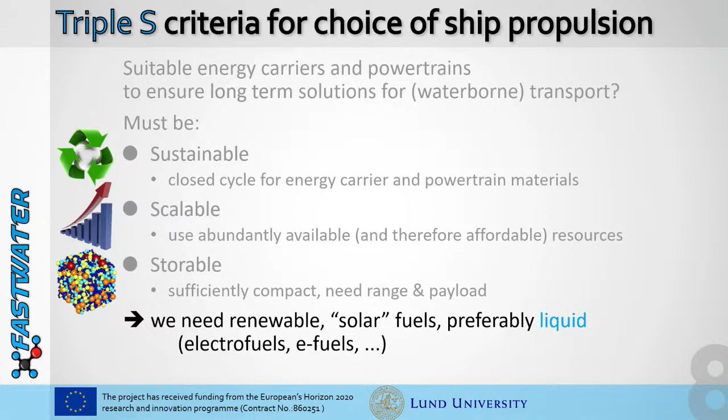First of all, there will always be a need for fuels. There's many things we can and should do electrically, but there are also limitations to that technology. For quite a number of applications, we need the energy density of a fuel. But obviously those fuels need to become renewable; we need to move away from fossil fuels. For applications where you really need storage density, there will always be a need for liquid fuels. So liquid e-fuels are definitely going to be needed for a number of applications.

If you combine these things and look at what we set out to do within the FASTWATER project, basically we see we have to go for renewable energy in the long run. So green electricity is what we will power a lot of things with. This is sustainable, this is scalable. It's a huge challenge to scale up renewable energy, but we know we have enough of it, so that's a comfort. Then we look at how we can actually make that green electricity manageable.

How can we power heavy transportation with this? We need to look for things with which we can store that power. So we're looking at producing green hydrogen, and capturing CO2, carbon dioxide. These are things that are abundantly available, so that answers the scalability issue.

Once we start building things from these scalable resources, we need to build smart things, and we think that methanol is a very smart choice. It's the simplest hydrogen carrier that is liquid at atmospheric conditions, which makes it storable. Having a liquid means the number of applications you can tackle with this is much wider.

On the use of methanol, obviously CO2 will be liberated again, but if you start from captured CO2, you set this up in a closed cycle, so you don't emit any net CO2. You don't contribute to any CO2 rise in the atmosphere.

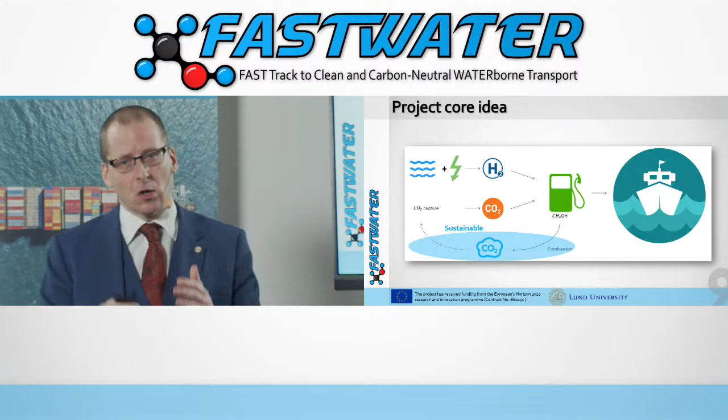So over 3 years ago, we started thinking: okay, there's a clear need for an alternative in maritime. We think this is a really strong candidate. We weren't the only ones thinking that—we saw a lot of interest growing around us. But we also saw that there were a number of challenges that still needed to be tackled.

What we identified 3 years ago is that, first of all, a number of people really wanted to start moving into this, but were hindered by the fact that there were no methanol engines commercially available in the power range, let's say 100 kilowatt to about 10 megawatt.

I'm happy to say that the first engine has now been launched commercially within our project. More of that you will hear a bit later this morning.

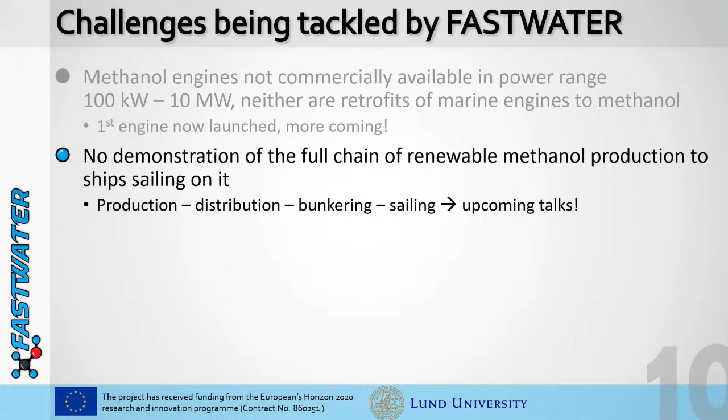A second big challenge was, okay, we need to move away from fossil fuels. Once you start looking into different fuels, it's a whole value chain that you have to start changing, from producing renewable fuel up to actually sailing on this renewable fuel. That's a daunting prospect. We needed to have demonstrators out there, and we have managed to do that.

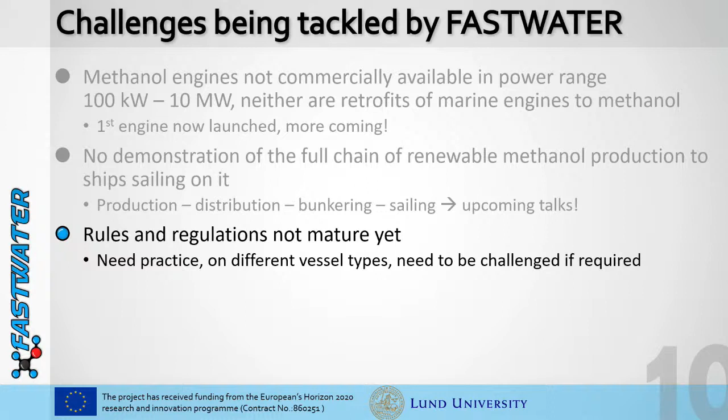Stay tuned for the following talks going into each part of this value chain. Also important, very frequently a hindrance to introducing new things is rules and regulations. There were embryonic rules and regulations a couple of years ago. It was possible to do this, but again, we lacked experience with them. We lacked demonstration on different vessel types to really get this into our fingers - what works, what doesn't work, how should we tackle this. So recognizing these challenges led us to submitting this project proposal to the European Commission and then getting it funded.

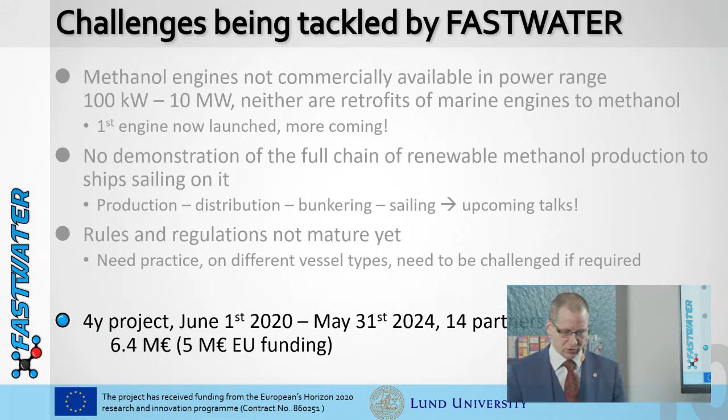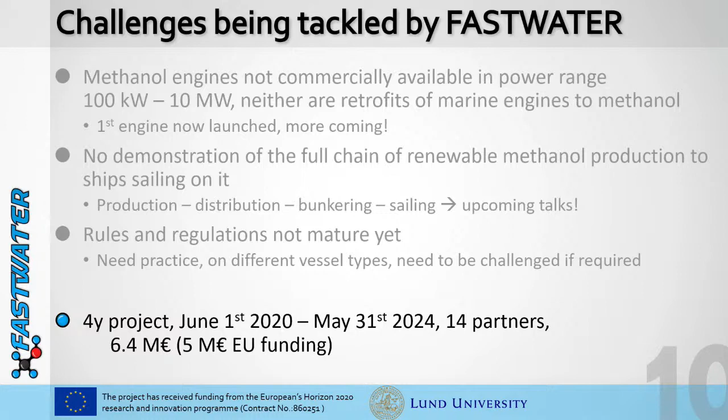We started about 18 months ago, June 1st, 2020, with a 4-year project with 14 partners that I'll show in a minute. What we are doing on a daily basis now is working on engines, working on different methanol engine technologies, working on different power ranges to really make these commercially available. We have the first products out there already, and more coming soon.

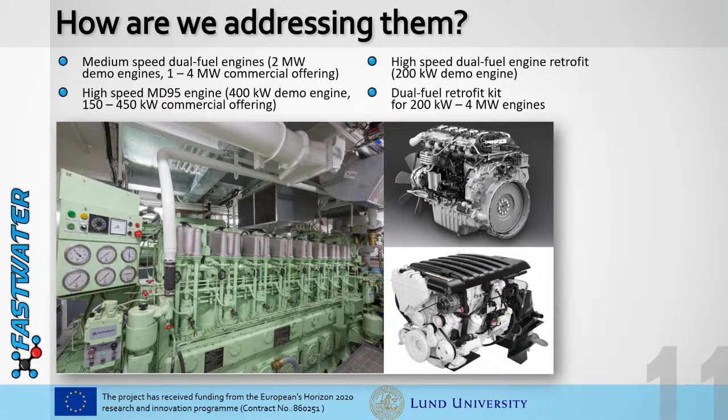But ultimately, these engines need to end up in vessels. So within this project, the one you are going to hear about today is the launch of the pilot boat. You're going to look under the hood in a couple of minutes. That's our first demonstrator, ahead of schedule, I'm very happy to report.

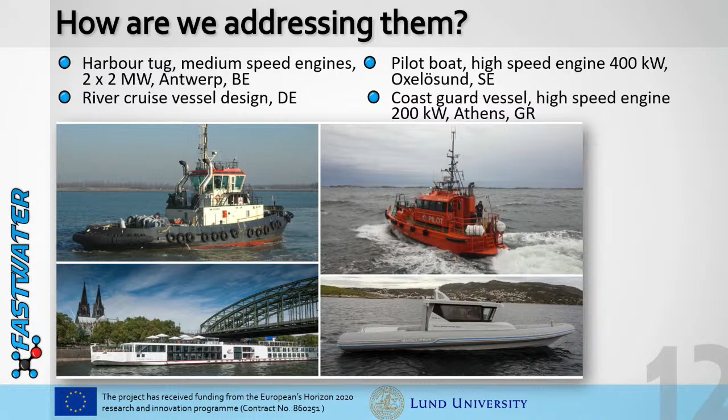And then simultaneously, we're also working out the design of a river cruise vessel - what it would mean to convert such a river cruise vessel, which you see on the bottom left, to the use of methanol.

So that's a number of partners, of course. Quite a number of pieces of the puzzle have to start lining up to make this happen. We're spanning quite a number of different partners, from fuel suppliers ultimately to vessel owners, such as the Swedish Maritime Administration. Even that is not enough, so we're very happy to have these partners on board, but we're equally happy to also have quite a number of partners in our advisory boards that help us with advice on how to really make this a reality, how to exploit this, where to identify early movers, to help us out with these guidelines, to tweak them so that this all becomes feasible.

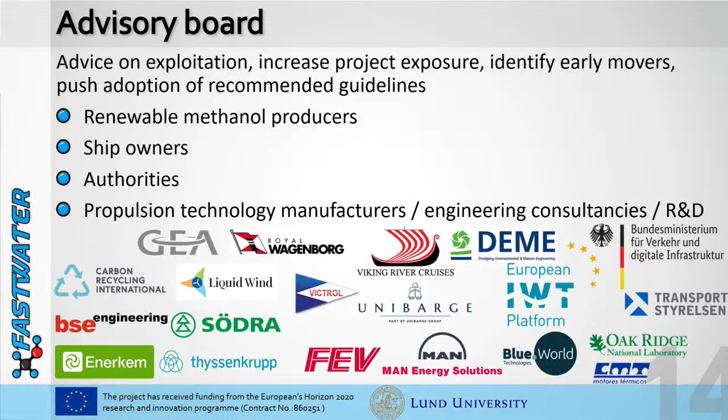So with that, thank you very much for your attention, and I'll happily pass it over to Mr. Eelco Dijkstra from the Methanol Institute.

Thank you very much, Sebastian. Good morning, all. First of all, a great thanks to the Swedish Maritime Administration for hosting today's launch event and for giving us the opportunity to present briefly to you. On the off chance that you may not have heard of the Methanol Institute, it is a global industry association. We represent the world's largest methanol producers, methanol distributors, technology providers, and increasingly also methanol consumers, especially on the shipping side. Companies like MSC, Oldendorff and Maersk are all members that have joined the Methanol Institute over the last year.

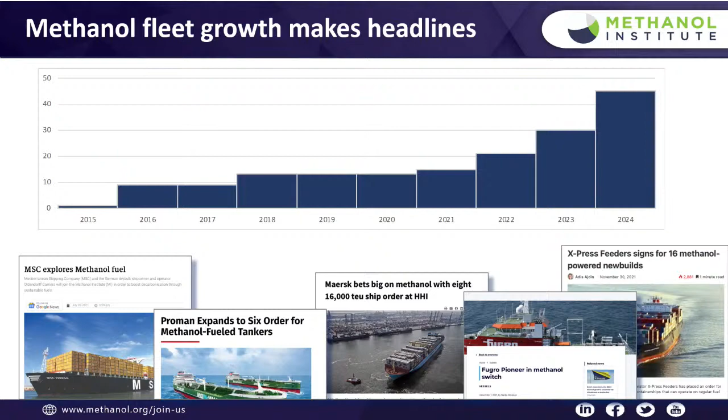Speaking of use of methanol as a shipping fuel, you only have to open up a shipping magazine or read a maritime website and you see all sorts of articles and headlines about promises of climate neutral, sustainable alternative fuels. What sets apart the different headlines, whether it's the announcement from Maersk of the 8 container vessels, or X-Press with their 16 feeders, or the 24 million euro subsidy that the Dutch government has provided for a methanol project with companies like Fugro, Van Oord, Boskalis and many others, is that methanol is not 5 years out. Methanol is happening today. We have approximately 45 methanol-powered vessels on the water today or on order.

There are more vessels on order as we speak, and it's only a limited amount of time before we will see the first 4-stroke engine, and really almost all major engine manufacturers are working on their methanol solutions. But the question is why? Why are people looking at methanol as an alternative fuel?

We had two speakers from the Swedish Parliament here today. Policy is an important driver behind what's happening in the shipping industry. We tend to forget that actually the first driver for the shift to methanol as an alternative fuel was not CO2, it was the introduction of the sulfur emission control areas by IMO. So in 2015, Stena Line introduced the Stena Germanica, which operates on methanol in the form of a retrofit. Since then, CO2 has become much more of a topic in shipping.

On the international stage, we have the IMO that is trying to drive the international shipping industry to lower carbon emissions, starting with 40% by 2030 to 50% reduction by 2050. But you can imagine that if you try and do this on the global stage, it's quite challenging, because where Western member states, Western countries and Western stakeholders feel that IMO is not moving fast enough, we have other parts of the world that are saying, well, hang on, we're going too fast.

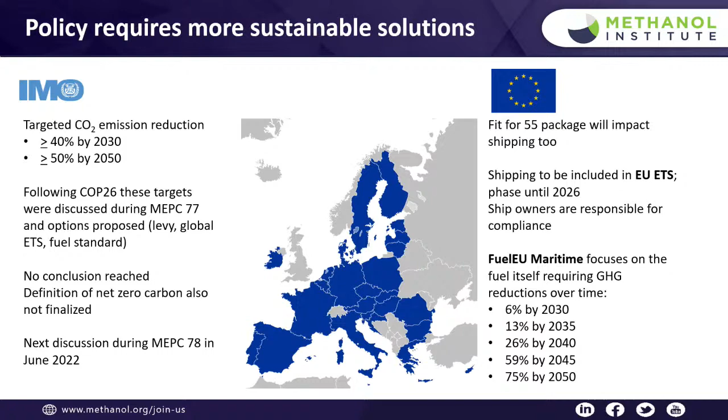And at the same time, Europe also has introduced the FuelEU Maritime regulation, which is looking at the fuel standard. Similar to what the Fuel Quality Directive did for road fuels, the FuelEU Maritime regulation is looking to reduce the actual carbon footprint of marine fuels.

So where does methanol come into that picture? Now, as I briefly touched upon, methanol, whether it's fossil methanol or renewable methanol, has an immediate benefit when it comes to reducing local air emissions. It can also drive CO2 emissions down, especially when you start producing renewable methanol.

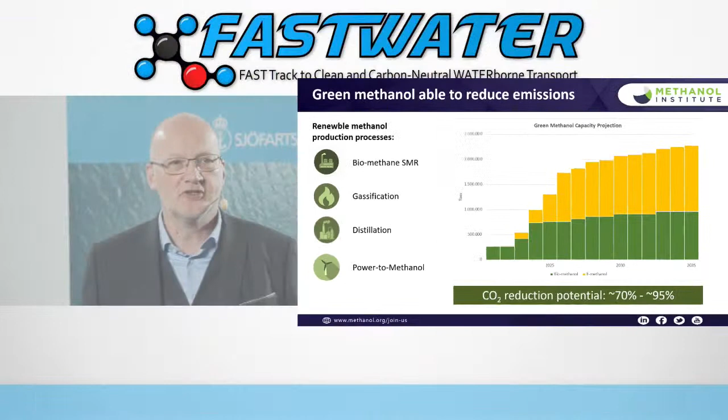The question we get asked often is, how much renewable methanol is available? When will it be available? In order to answer that question, we first need to look at how we actually produce renewable methanol. I'm not an engineer, I'm not a chemist, so I've definitely oversimplified things here, but really you can bracket, or put the production of renewable methanol into four different buckets.

Today, most of the methanol produced worldwide is made from natural gas. If I switch over from natural gas to biogas, I don't actually have to change anything to my methanol production process, but I can start producing biomethanol. Another way of producing biomethanol is by gasification of either biomass or municipal solid waste, which gives you a syngas, which is then easily reacted into methanol.

The next speaker after me is from Södra, and he will talk in much more detail about the specific process, which I have simplified by calling it distillation. I know that's not completely doing it justice, but we'll hear more about that. And then the last pathway, also briefly touched upon by Sebastian Verhelst, is the production of so-called e-methanol, or in legislative terms called renewable fuels of non-biological origin, which means as much that we take renewable electricity, convert the electricity into hydrogen, and then react the hydrogen with carbon dioxide to produce methanol.

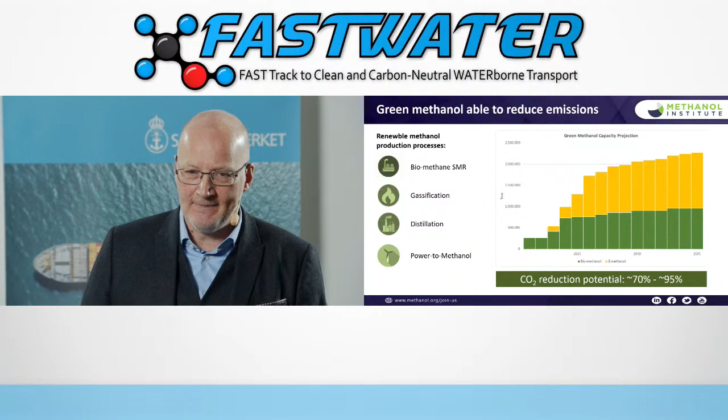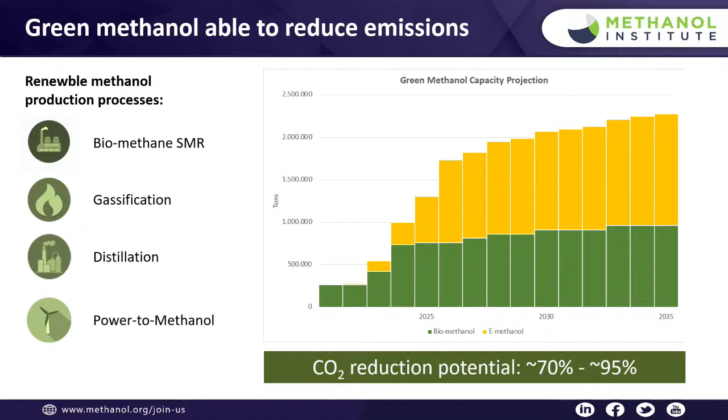In the chart that I'm showing on the slides here, I have tried to summarize what we have seen in terms of various announcements of different projects. Roughly we see projects equating to an order of magnitude of about 2 million metric tons of renewable methanol in the next 10 years or so. Probably some of those projects will not come to fruition, but then again, every other week there's an announcement about a new project, so we're quite optimistic about where this will be headed. But the future will only tell, and it's really a question between supply and demand.

It's a chicken and the egg discussion, as usual.

So to summarize, why methanol? Methanol is liquid at atmospheric pressure and available in all major ports around the world. It results in immediate lower emissions, so better local air quality, but it also has the potential to reduce carbon dioxide. Something often neglected in these discussions is that methanol is biodegradable, so you shouldn't have a spill, but when you do, methanol causes very few problems.

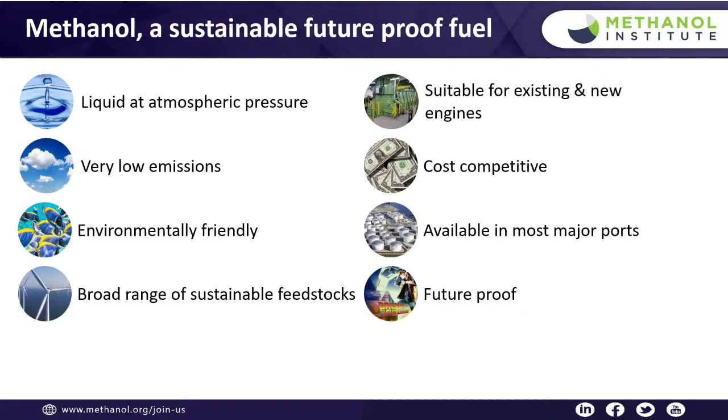Methanol can also be made from a wide range of renewable feedstocks. It can be cost effective, and when you look at various studies on the transition to alternative fuels, methanol is one of the lowest cost solutions in terms of total cost of ownership. So really, methanol is a future-proof fuel, but one that's already available today, and it's here to stay.

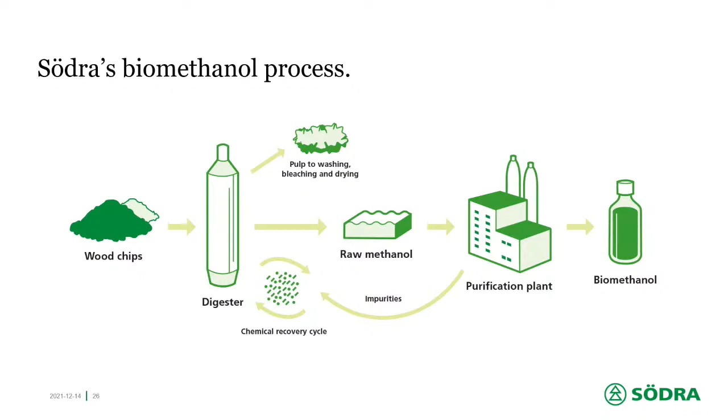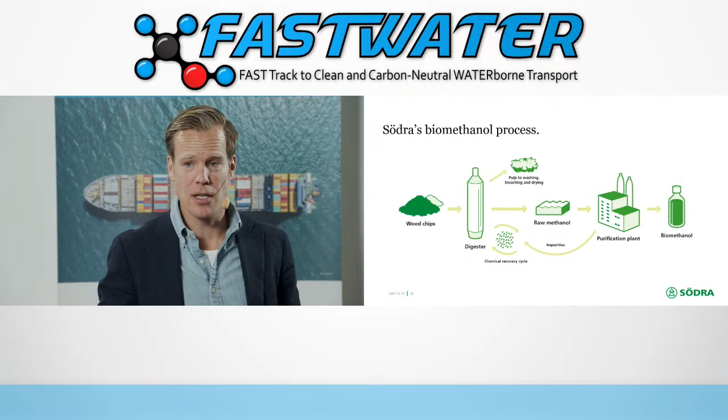During this operation, biomethanol is also formed together with other volatile compounds. This mixture we call raw methanol, because it's composed of different things, and it's really stinky. What we need to do is purify this stream — we remove all the components, and what's left is our methanol that we can then sell into the market. So that's a simple explanation of how this works. Sounds easy, but it's not — it has taken us many, many years to develop this.

Just to give you an idea about the journey that we have been on, we actually started this project roughly 10 years ago, with the first idea of how we could start supplying the next generation of biofuels. A year later, we had to construct a special lab just because the product is so stinky, and we did it in one of our mills in Mörrum, with promising results. So 2 years later, we moved on with a pilot plant. And a couple of years later on, we saw that, yeah, this is commercially viable.

Let's move ahead with a pre-project and see how we could actually construct this. And 2017, our board took a decision to move on with the commercial plant. And just the day after, the procurement phase and construction phase started. And during fall 2019, we fired up the plant. And it was really a bumpy start, I must say that. Sometimes you had 2 steps ahead, 1 back, sometimes 3 back. You know how it is. This is really tricky.

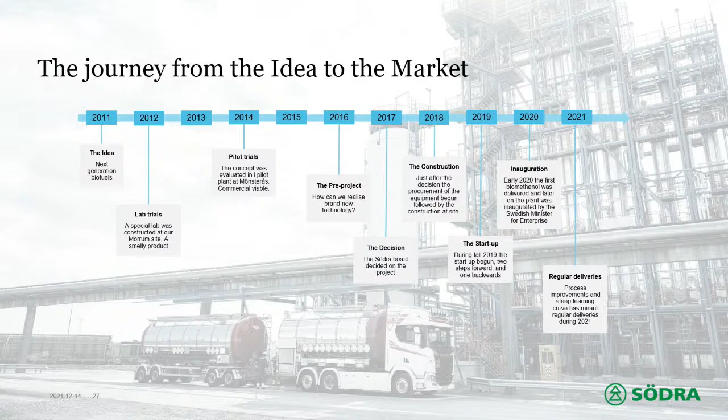But roughly a year ago, during the autumn 2020, we had an inauguration with the Minister of Enterprise, Ibrahim Baylan, who pushed the button. And since then, the mill has been working really, really good. We are now up at the design capacity, and we are selling this product out regularly in the market. I was really pleased now also with the pilot boat here being bunkered with our methanol.

The application, let me put it like this. The methanol market is huge, 100 million tons plus. The biomethanol market is really a niche market. We try to find those that value a product that is based on the forest. And today we sell it into applications like pharma, we sell it into the flavor and fragrance industry, and of course to the biofuel market, which is the big one.

There's a huge difference, of course, compared to our volume and the total market volume for methanol. But this kind of technology is possible for all kinds of pulp mills all over the world. And if we look at that potential, then we're talking about 2 to 3 million tons of biomethanol that might be produced from these pulp mills. A really resource efficient way.

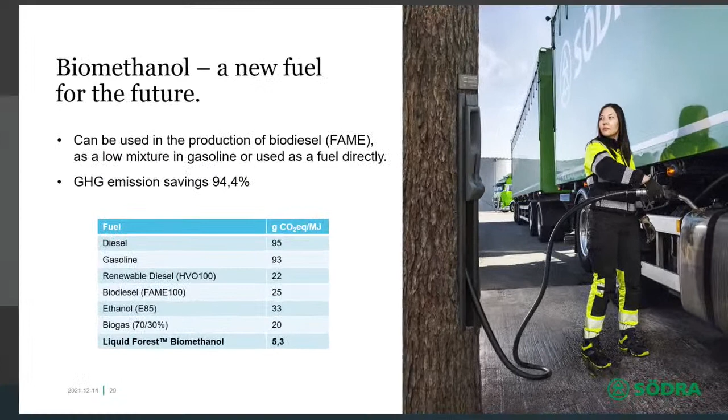Talking about biomethanol as a fuel for the future, well, there are different ways of using biomethanol. Our biggest customer today, they produce biodiesel according to the FAME process. That's one way of using methanol. Another way is to use it as a low mixture into the gasoline pool. Or, as we're learning today, use it as a fuel directly. And if you use it as a fuel directly, you save a lot of greenhouse gas emissions. We are talking about, with our numbers, 94.4% that you save.

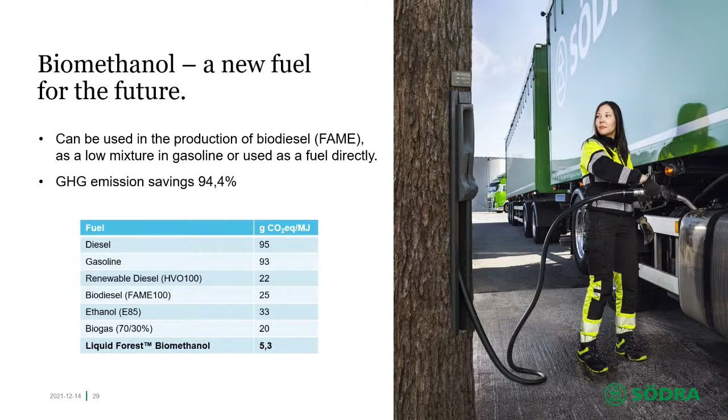And if you compare it to other kinds of fuels that also emit carbon dioxide, also those renewable alternatives, you see that HVO or FAME or ethanol, they emit 5 to 6 times more carbon dioxide than biomethanol. And biomethanol is really a very good example showing how you could work resource efficiently.

So I'm really happy to be here today with this kind of new chapter also for biomethanol being used as a fuel directly. And I'd like to congratulate everyone involved with this pilot boat conversion. I think this is a great way to show how we all can cooperate together and save greenhouse gas emissions. And by that, I would like to end and just remind everyone that the future is made of trees. And now I hand over to Magnus Persson, who will talk from Malte Fuel and Wash.

Thank you. Thank you, everybody, for being here. I will say a special thank you to the Member of Parliament here and also the General Director for Sjöfartsverket, the Swedish Maritime Office, project delegates, and ladies and gentlemen.

Today it's an honor for us, this project here, that we have been chosen to be the supplier handling the fuel. It's 100 years ago since we did the first fuel distribution installation south of Halmstad. And it is great to see that new fuels are coming to the market instead of what we have had before.

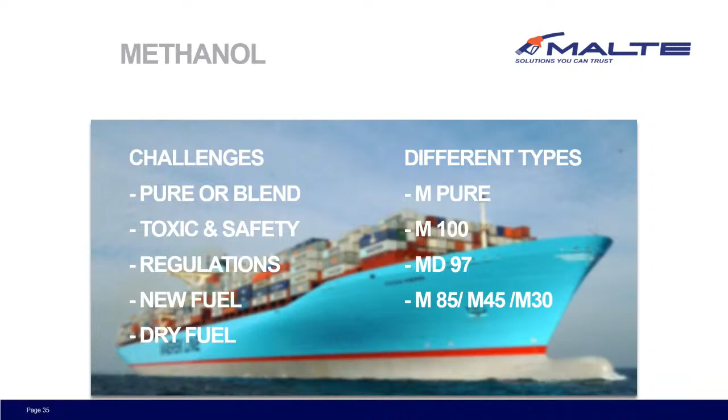Then of course everybody's talking about toxic. What is toxic for what? Is it toxic for human beings, living animals, nature, water? If it's toxic in one situation, it's not in general. So it's also important to understand what is the need and what is the danger. If petrol had come today as a fuel, it would have been sold by prescription in the pharmacy. So it's a way to understand, and society needs to be educated and trained for it.

Another thing I will address, especially to the politicians here, is that we have a mission here with regulation, especially in some of the European countries: the fire class 1 product integration in an industry which normally works with diesel or marine gas oil. That's the mission, to understand the safety aspect and to take care of it.

So we have a new fuel in combination with that. When we have 170 boats or something like that, some will have a new fuel, and that really needs a training session and understanding with all staff handling it. And of course, it's very dry with methanol, so it needs to have lubricants also.

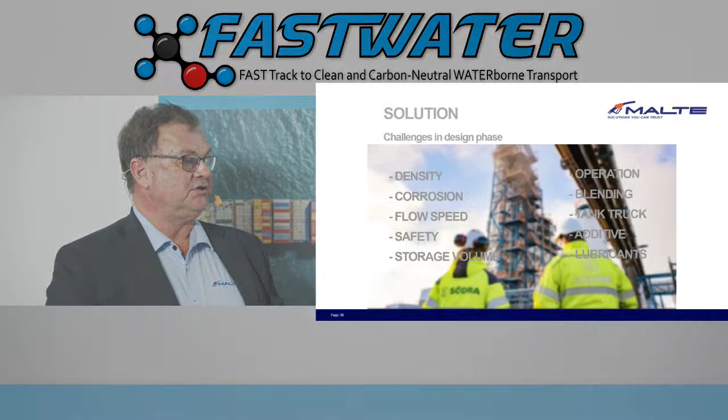To work with a distribution system for this type of product, MD95, we need to take into consideration the different densities of all components. But we also have new corrosion questions with absorbing water. Of course, flow speed, that depends on which type of application. And of course, the safety handling, from trucks, depots, and on-site boats.

People shall not be afraid, but increased understanding is super important. So please address to the Swedish Maritime that education and training is really important to increase the understanding. We can see also that handling lubricants, additives and tank trucks is a process, and we will be more aware of it and find a very good solution.

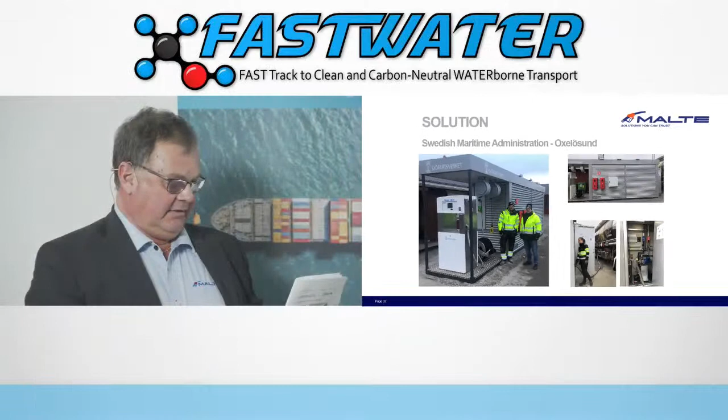Here we can see what we have delivered to Oxelösund. It's a complete movable solution, 10,000 liter storage capacity with 7.5 cubic meters methanol and 2.5 cubic meters ignition improver. But we shall also have lubricants, and it's blending inline during the process of filling the boat. We shall have approval for all fire rules and safety rules in Sweden, but we have done a construction which fulfills the ATEX rules for Europe.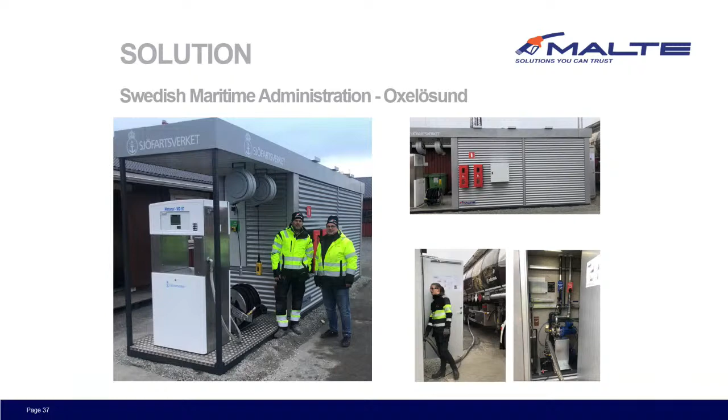There is the secondary containment, leak detection, blending, special requests from the owner on how the process shall be handled to the boat, safety distance to the sea, drip-free connections. And then, of course, I take the opportunity to have some company identity and profile on it so we can see who is the owner. It's always difficult to sell a fuel which is flammable, no packaging, hazardous, with safety aspects. Therefore, the corporate identity is important to show what we really would like to have.

I would also like to thank you; it has been a fantastic opportunity for us to increase our knowledge to handle new types of fuels for Sjöfartsverket and this MD97.

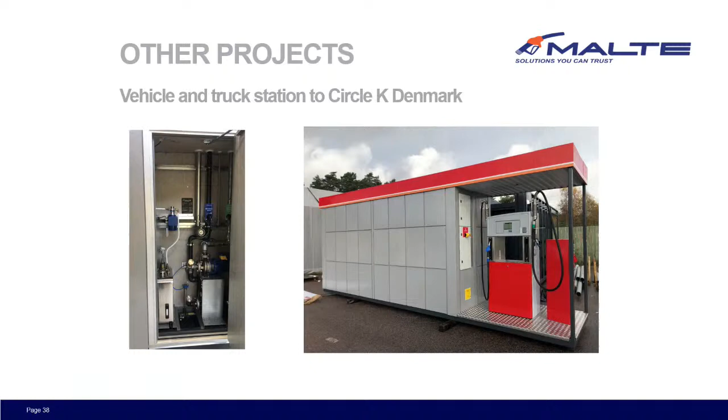But I must take the opportunity to give you some brief information on what more we are doing in the methanol area. Because Denmark, our neighbor country, has decided to go for 90% exchange of petrol to methanol until 2034, very soon. And they are producing 3 types of this unit for blending M100 to petrol, but also M100 for lubricants for spark ignition engines.

So different applications need different types of engines, and then also different types of mixtures of products. So we can see here very soon that MD97, M100 with lubricants, M-Pure and M85 will be the new fuels on the market for many years ahead. And in Denmark, we will see Power-to-X, as electrolyzed water merged with green carbon dioxide. Then there will be more or less no limitation of availability. It will be a fantastic possibility.

And I'm representing a very small company here, but when companies like Maersk, Ørsted, and Sjöfartsverket understand what is the future, this will really be a possibility. But Sweden can't do it by themselves. We have a fantastic pilot project here. We're going ahead, but to be a success story, it must also be introduced in other European countries, like Germany, Netherlands, Austria, and Poland.

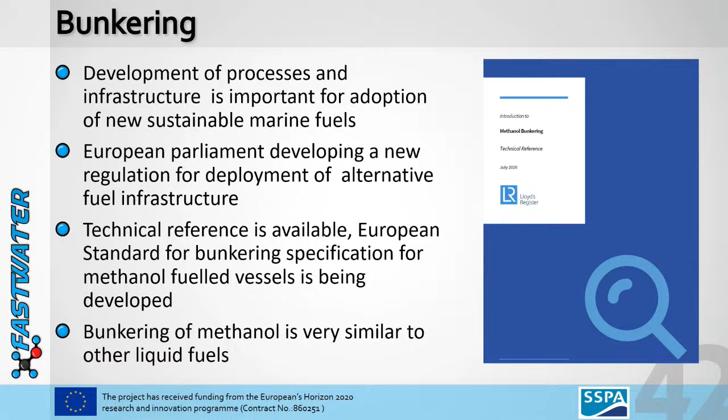And on the side of methanol, there have been developments regarding bunkering specifications on a European level, and technical references to have processes in place to make bunkering methanol more routine and understood. And of course, methanol, being a liquid fuel, is very similar to other conventional marine fuels that are bunkered, and the same processes used to bunker these to ships can also be applied to methanol. For example, ship-to-ship bunkering, a way of bringing the fuel on in large quantities suitable for large vessels.

There has been one demonstration so far, in 2021 at the Port of Rotterdam. Here you can see a large chemical tanker being bunkered with an existing methanol barge, demonstrating the process can be carried out very efficiently using a lot of the existing infrastructure in place, which is quite a benefit for an alternative fuel.

Another method, up to now, truck-to-ship bunkering has been used the most for methanol, which is the case for new fuels as they're coming in, when there isn't a market yet for bunker vessels delivering to large vessels. As an example, in Stockholm, the Viking Mariella has bunkered methanol from the quayside from a truck for their onboard methanol fuel cell installation.

And of course, in Gothenburg, we have the well-known example of the Stena Germanica, which has been bunkering methanol by truck since 2015 and has had hundreds of safe transfers of methanol to the vessel. In this case, they have built some specific infrastructure at the shore to facilitate faster transfer of the methanol by pumps and additional safety equipment.

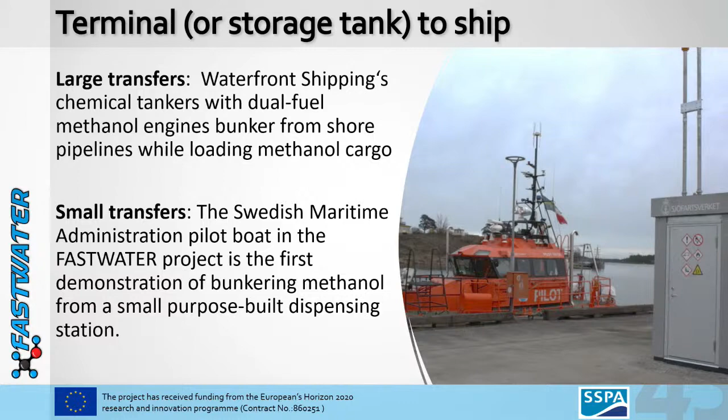Today we will see the first ever demonstration of bunkering a small pilot vessel using a purpose-built dispensing facility, which we heard about from Magnus. It's very exciting to be part of this demonstration. I'm going to show a short film demonstrating how methanol was supplied to the Oxelösund pilot boat station and how it's brought on board the vessel.

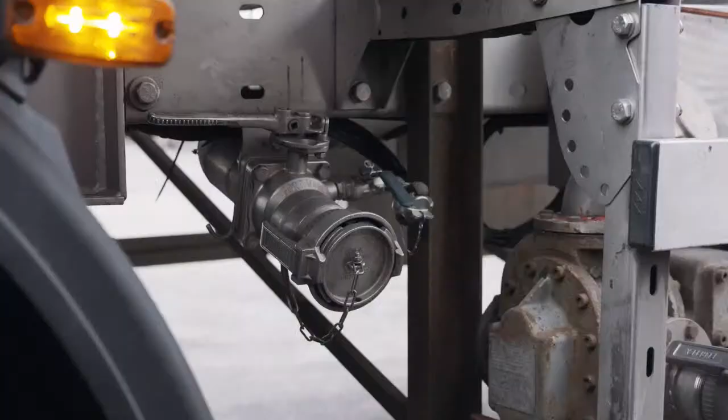You can see it being transported in a road tanker, methanol from Södra, the green plant-based renewable methanol, arriving at the Oxelösund pilot boat station, using procedures in place for road transport of methanol and other flammable liquids, regulated by a common procedure today.

Connecting the pilot boat methanol station, constructed by Malte, to the truck to transfer the methanol, following the required safety procedures. You can see here, for example, grounding the truck to the bunker station to ensure there's no electrostatic charge buildup, which is important for the transfer.

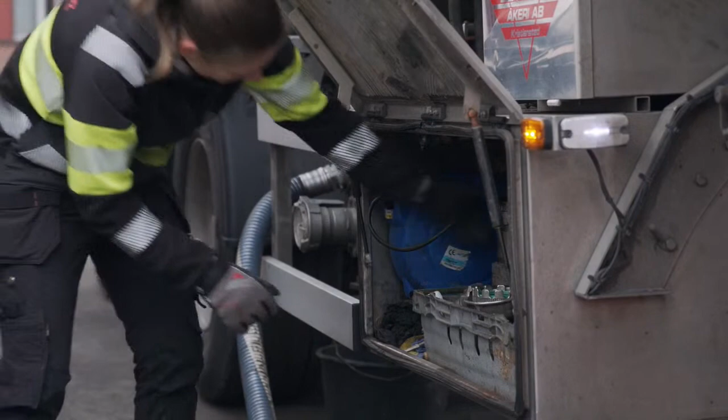Another safety feature is that the hose connection is drip-free, ensuring no spill even of a small amount of methanol when disconnecting after bunkering. Also important from a safety perspective, the tank level gauge is connected to the truck so that when the maximum level is reached, there's an automatic shut-off, preventing any overfill problems.

Required safety equipment, of course, includes goggles and gloves, necessary for handling methanol and starting up the transfer procedure.

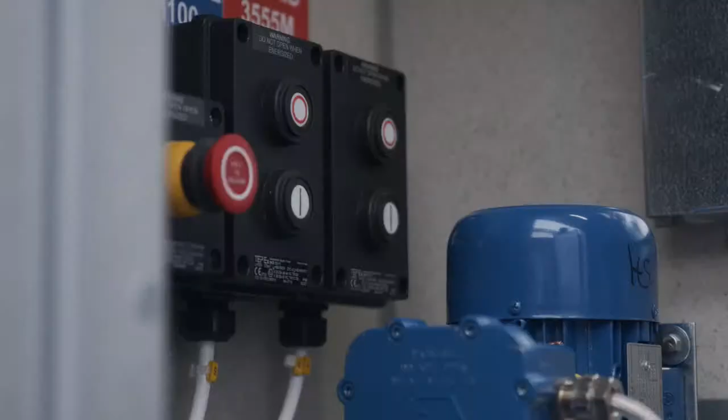The pump is integral to the bunker station, so the pump starts here, transferring the methanol into the M97 methanol station, where before it's loaded onto the pilot boat, the methanol will be blended with additives.

Here as well, the connection to the pilot boat is also of the drip-free type, to ensure again no loss of methanol after disconnecting. You see the connection here to the pilot boat bunker pipe.

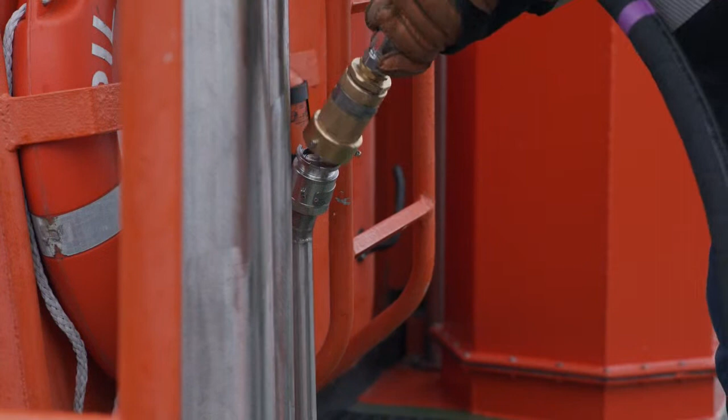There is also a tank level gauge on the pilot boat that will be connected to the pumps, ensuring that as soon as the maximum level is reached, there will be an automatic shut-off of the pump and no risk of overfilling.

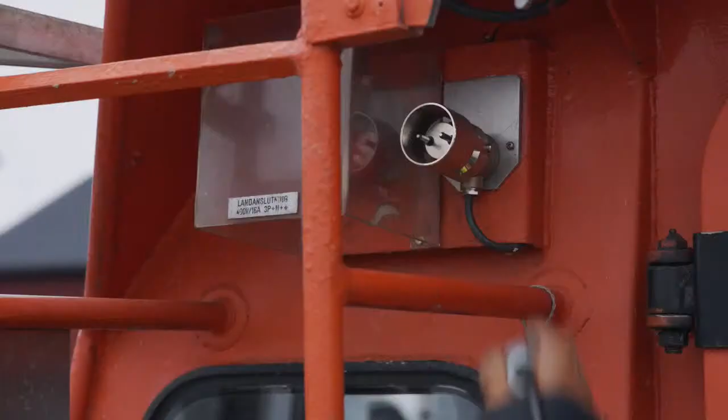Also for starting and stopping the methanol transfer, there is a handheld device that must be depressed, and as soon as it's released, the transfer will stop. Another safety feature.

Ensuring the operator is able to stand in location and observe both the transfer of the methanol and the station. It's finished, and off goes the pilot boat.

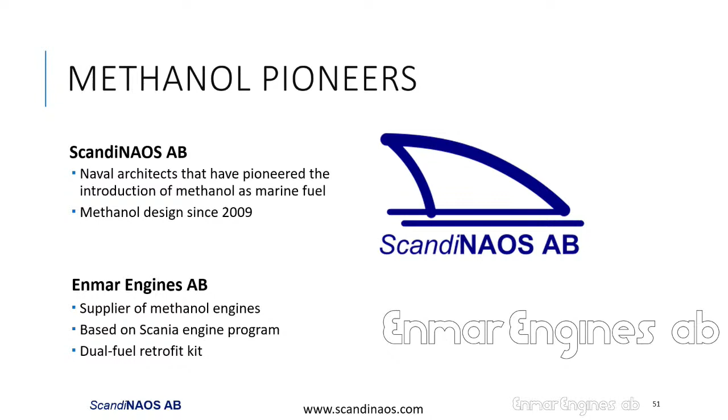Our company ScandiNAOS started in 2005. We have been into methanol design since 2009. We like to call ourselves methanol pioneers, and there's some substance in that saying, because we have actually taken part in a lot of methanol conversions and methanol design projects over the last 12 years now, all the way from large RoPax ships to pre-studies, smaller boats, and now also pilot boats. And we've been involved in many real projects, so real conversion designs.

We started a sister company, Enmar Engines, that will only focus on methanol engine production. Within ScandiNAOS, we have developed methanol engines for 5 years now, and we have seen that there is a huge request on the market for this size of engines. So that is the background for that.

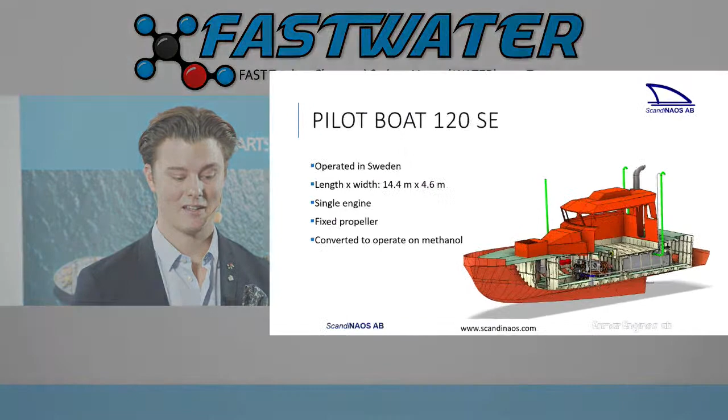This is the pilot boat 120 SE. It operates in Sweden by the Swedish Maritime Administration. It has a length of 14.4 meters and width of 4.6 meters. So it's a typical pilot boat. It has a single engine, a fixed propeller, and this is the boat converted to operate on methanol, which you see on the illustration here.

The boat is, if we start from the front, we can see a forepeak. Then we can see the bulkhead below deck. We have the engine room. And then aft we can see the fuel storage room or the tank room, which is also the rudder room.

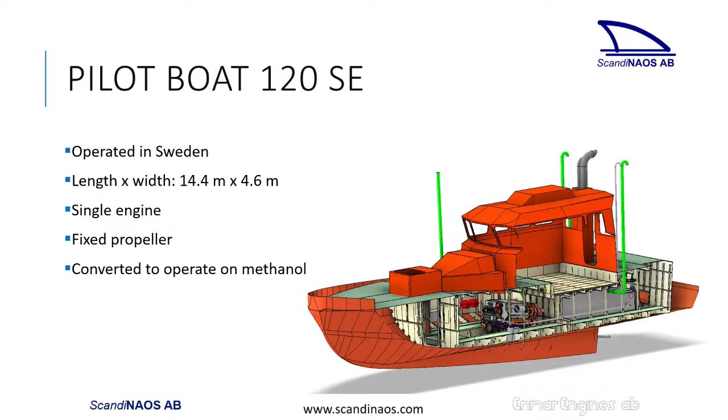I will tell you very briefly about why we should use methanol as a fuel, why it's good for us, and then you have to allow me to become a bit more technical in my presentation. I hope you appreciate it.

So why should we use methanol? Methanol is a clean burning alcohol. There's no sulfur in the fuel. And if you don't have sulfur in the fuel, you will not have sulfur oxides formed in the combustion. Sulfur oxide is in some cases recognized as SOx. So this boat, using methanol, will not lead to any SOx emissions.

Methanol is a simple alcohol, and when combusting methanol, no particles are formed. It's actually physically not possible for methanol to form particles or form soot, which soot and particles are in other words for long carbon chains. This is not possible, so we will not have any particulate matter formed from this type of engine.

Methanol also reduces the emissions of NOx, nitrogen oxides. Nitrogen is not part of the fuel, but it's part of the air that goes into the engine. And in the combustion, in the chemical reaction, NOx is formed. And since methanol burns cool, it has a cold combustion, we will have reduced emissions of NOx.

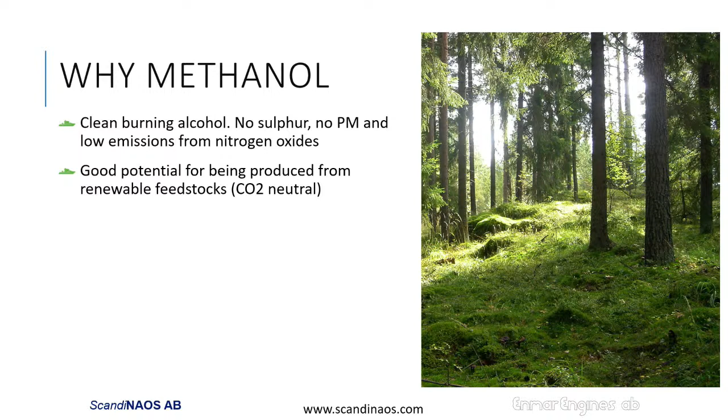As my previous speakers told us, methanol has a very good potential from being produced from renewable feedstocks, both as biomethanol but also as e-methanol, which is produced from renewable electricity. Methanol is biodegradable, does not bioaccumulate in aquatic environments, so we shouldn't have a spill, but if we have, especially in a marine environment or marine sensitive environment, it's highly important that we do not cause any environmental problems.

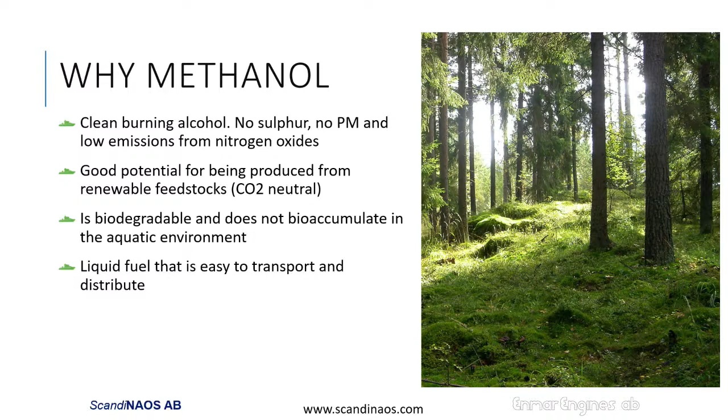It's a liquid fuel that is easy to transport and distribute. And from a logistic and transport point of view, we can always discuss different technologies for how to transport it and the challenges, and it is an important fact that's covered here. But liquid methanol is more like diesel to transport than transporting a gas, for instance cryogenic gas or compressed gas. So it is, after all, a quite simple mixture, a quite simple liquid to transport.

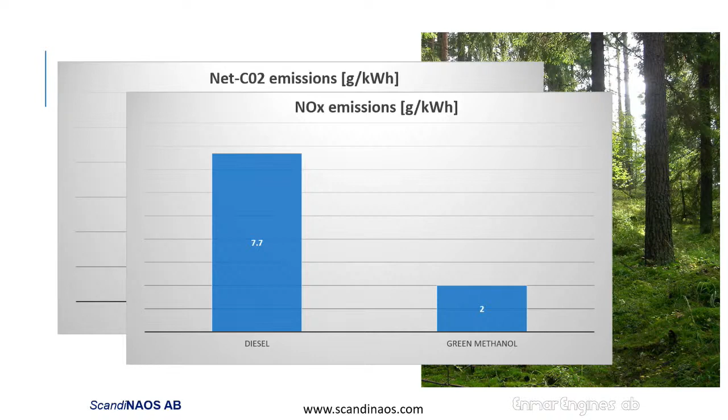The ship pilot boat 120 SC is a conversion of an existing vessel. There used to be an IMO Tier 2 engine installed on board, where the emission of NOx is 7.7 grams per kilowatt hour. Producing the same power, we reduced this to 2 grams for the engine that is installed now.

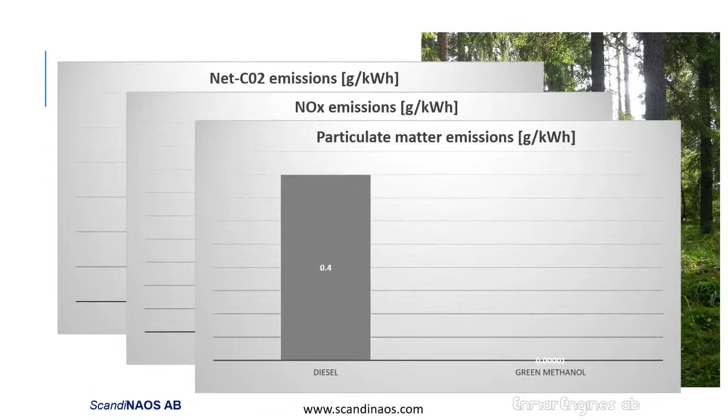Particulate matters are not formed in the combustion of methanol, so this is reduced to zero. A typical example is the previous engine that was installed on board a pilot boat, where the emission is 0.4 grams per kilowatt hour.

I will go through some design challenges of a methanol ship. Methanol has different properties than diesel. It's not in all cases a worse or more difficult liquid to handle, but we have a standard level of how to handle and how to make a diesel installation, how to handle the diesel fuel on board. Methanol has different properties.

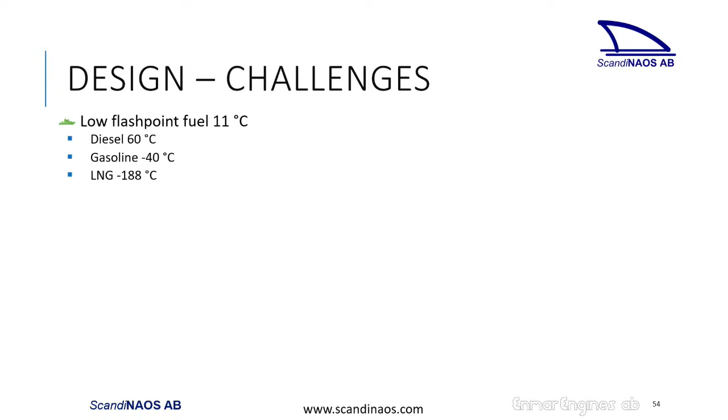Some of the challenges we need to cover here is that it's a low flash point fuel. The flash point of a fuel is easiest described by having methanol or any fuel in a pool. If we imagine a spillage or pool of methanol in front of us, at a certain environmental or surrounding temperature, in this case 11 degrees for methanol, the vapor produced from this pool is enough to create a flammable atmosphere. And if we have an ignition, we could have a fire, or we will have a fire. The same goes for diesel, but here the temperature is 60 degrees. Gasoline requires a temperature of -40 and LNG -188.

Since 11 degrees Celsius is a quite normal temperature on board a ship in our environment, we need to find a design to handle this challenge. A methanol flame is almost invisible in daylight, so we need to find another way of detecting a methanol fire than the traditional way.

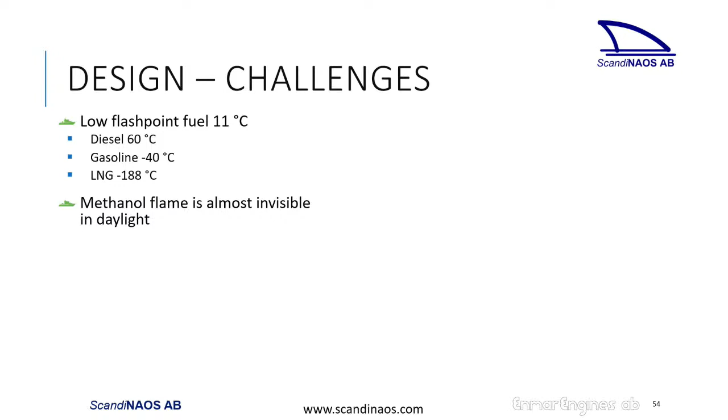The reason methanol is more difficult to see in daylight is that it doesn't produce any soot. So a diesel fire or gasoline fire has an intense orange-yellow color, while a methanol fire is more of a blue flame.

On the other hand, we have some benefits for fire suppression. Methanol has less heat radiation than a corresponding diesel or gasoline fire. So if we have a fire, the heat radiated from the methanol fuel is lower. You can stand very close to a methanol fire without hurting yourself from burn heat injuries. And it's also possible to extinguish the fire using water.

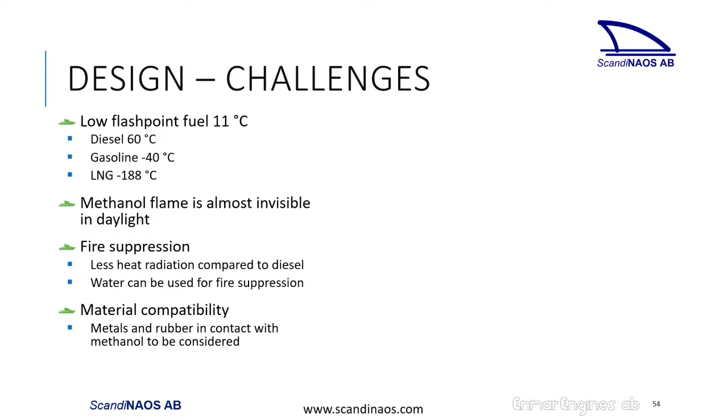We have some challenges with material compatibility. Material compatibility in terms of metal and rubber in contact with fuel needs to be evaluated all the way from the tank through the fuel lines and also in the engine. We need to be aware of all the materials the methanol is in contact with. It's not worse than diesel, but other materials and other rubbers and metals need to be considered, so it needs to be evaluated all the way.

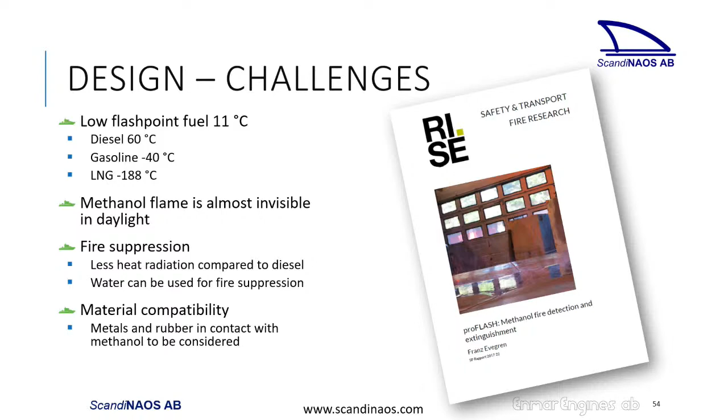Luckily, we have some experience from previous projects. We have a research institute of Sweden, RISE, who's been evaluating methanol fires and how to handle leakages, and we also have extensive, quite rigid experience from previous projects, both in my company, ScandiNAOS, but also in other companies and organizations for how to handle this type of challenge.

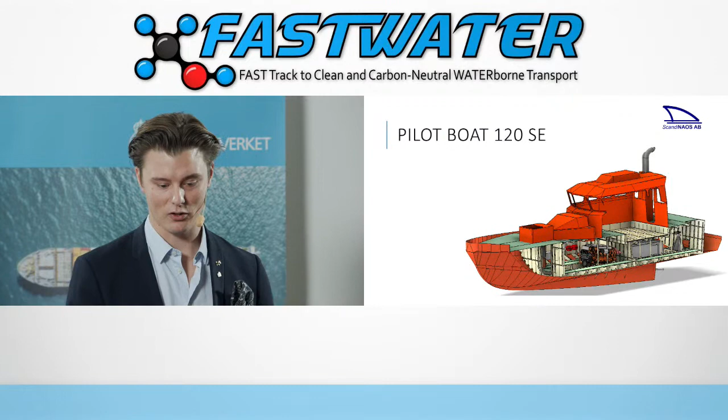This is the pilot boat before it was converted to methanol, and I will show you the next slide, which shows the full conversion. So I'll go back again, and then we'll go forward again. You can see that some components are added in the design, and I will go through them.

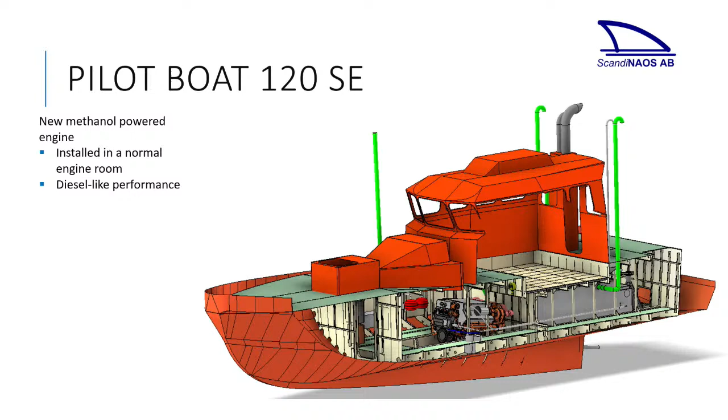There is a new methanol-powered engine installed. As I said before, we have the forepeak, and after the forepeak, we have the machinery room. This engine is a methanol-powered engine based on a diesel engine. I'll go through it more in detail later, but the physical dimensions of the engine are like a normal diesel engine. The engine is connected to a gearbox, much or identical to any reverse gear installed for a diesel engine. It has the same propeller shaft and the same propeller as with the previous diesel engine. This means the engine needs to have the same performance or drivability as a diesel, and it has, and that is what it's dimensioned for.

We have double-walled fuel pipes and a double-skin, or double-walled, tank. If we take a look at the aft of the ship, we can see the rudder room, aft of the engine, and the gray unit there is the fuel tank. The fuel tank is designed from stainless steel, as a tank inside a tank, so there is an inner tank and an outer tank with a small interbarrier space between the two.

The inner tank is filled with methanol, and the outer tank is used as a second safety barrier, because we do not want to have a leakage in the ship. So if we have a leakage from the inner tank or any component connected to it, we can detect it and send an alarm, but it's still kept in the outer tank, so it's still safe to operate the ship.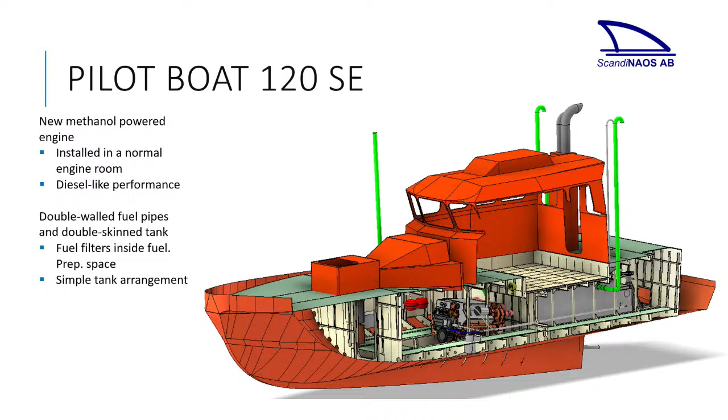The same goes for the fuel lines, which are gray in this illustration, from the fuel tanks up to the engine — those are double-walled. So if the inner pipe had any leakage or would break, this would be collected and detected in the interbarrier space. So there's no risk for the people on board or for the safety of the ship.

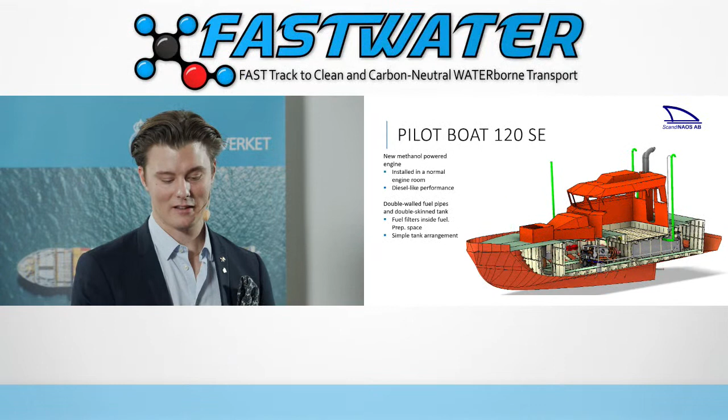I just want to emphasize that it's a very simple construction. We replace the tank, but the tank has the same outer design as the previous tank. It's slightly larger to fit more fuel in, but we should remember that this is the conversion of an existing ship.

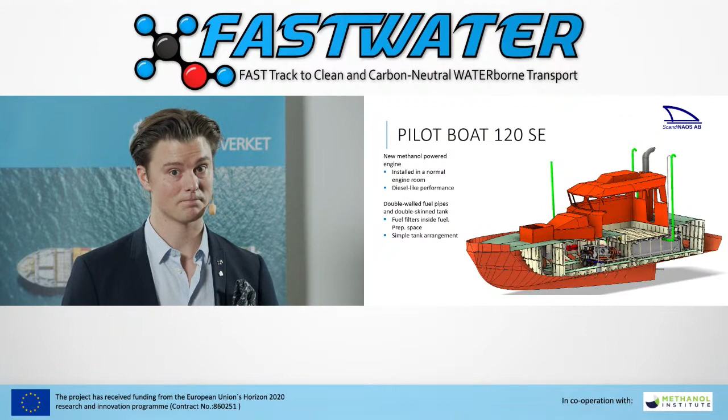We have leakage alarms for methanol leakage to detect this and give an alarm. There is one alarm placed inside the engine room, one alarm placed on top of the engine, and one alarm placed in the interbarrier space between the inner and outer tank.

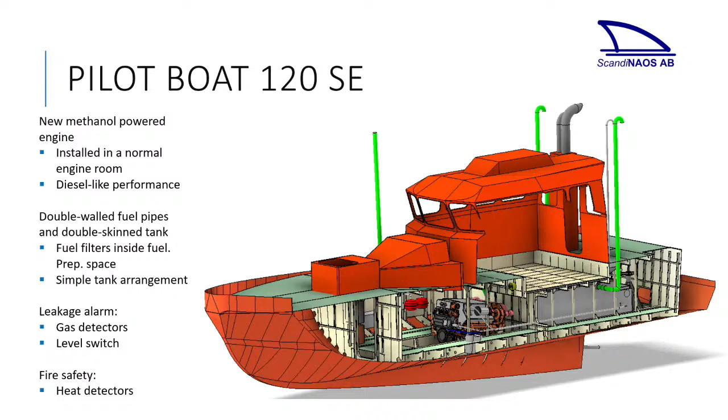And for fire safety, as we said earlier, if we have a fire, the flame could be difficult to detect in bright daylight. For this reason, the traditional smoke detectors are also complemented by heat detectors, so we have an extended fire detection system on board.

Traditionally, methanol is a fuel that's easier to ignite with a spark plug — you spray it, mix it with air, then ignite it with a spark plug. But this is not the technology we're using, and there are some reasons for this. One of the most important reasons is engine performance: we want to have the diesel characteristics of the engine, the diesel performance. I'll go more into that later.

But to make this work, we need to replace a few critical components inside the engine. One is that the compression is increased to make the methanol burn easier, or auto-ignite easier. The second is that we are using a dedicated methanol fuel system for fuel injectors and the fuel lines on the engine. The methanol is also mixed with 3% of ignition improvers, which makes it behave more like a diesel fuel.

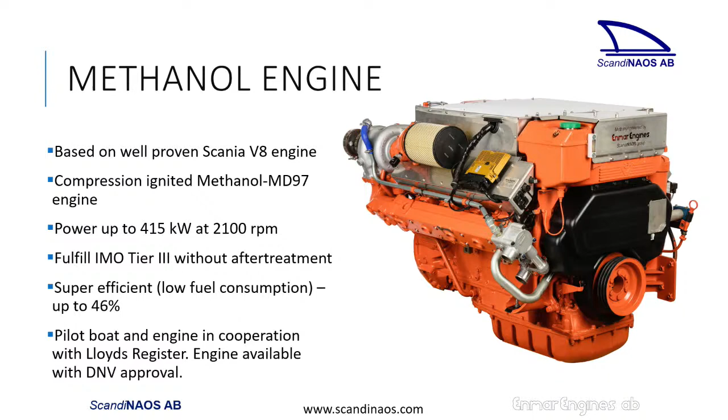The pilot boat and the engine were developed in cooperation with Lloyd's Register, so they have taken part all the way through this development process in different types of risk assessments. And in a parallel project to the FASTWATER project, we have also been involved in a process for DNV approval. It's an identical design of the engine for both Lloyds and DNV.

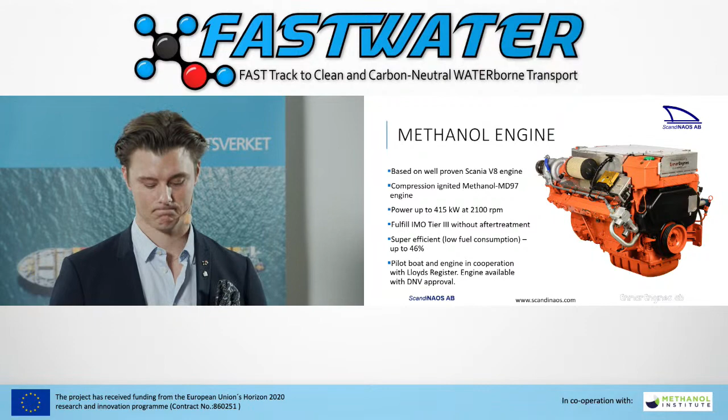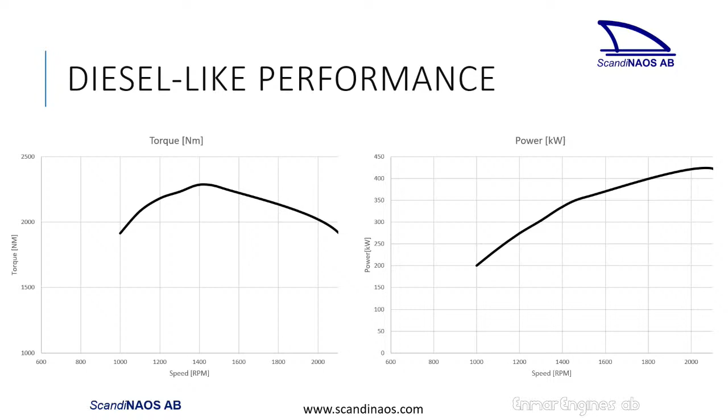These curves tell me as an engineer a lot of things. I don't know what they tell you, but I will quickly guide you through them. On the x-axis, we can see the same thing for both the torque and the power curve, so we have all the way from 600 RPM up to 2100 RPMs, or 2000 as indicated here. On the y-axis, for the torque curve we can see the actual torque in Newton meters, and on the power curve we can see the power indicated.

I will keep this short, but it's very important to show that this is the typical characteristic of a diesel engine. We are burning methanol inside a diesel engine and still able to have the same characteristics of the engine. This means the operator will not notice any difference whether they drive a diesel engine or this one.

That's important for many reasons, but for example, in an installation on board a pilot boat, this is actually a critical safety aspect. Imagine you drive the boat in hard weather up to a larger ship, and waves take you back and forth. You need to be able to have the immediate torque, the immediate response to get out of this situation. It could be reverse or going sideways, but you always need this amount of low RPM torque from the engine.

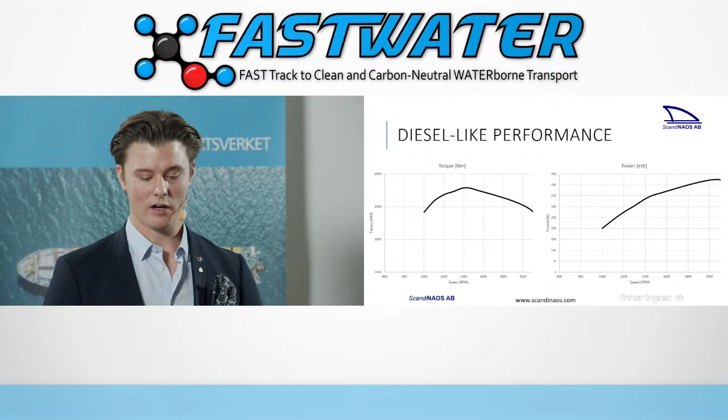Taking a look at the power curve, we can see that between 2000 and up to 2100 RPM it's quite flat, and this is also something we wanted to achieve. This means the propeller matching is easier - we do not have to meet a specific point at the top maximum power. We have some margins to play with, and this is also something we wanted to achieve. So we're very proud of this.

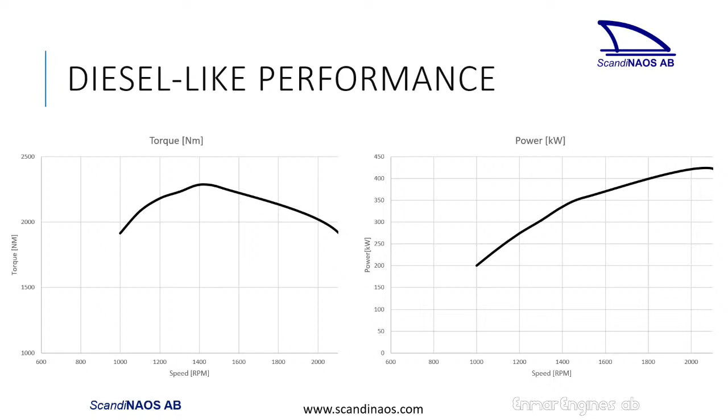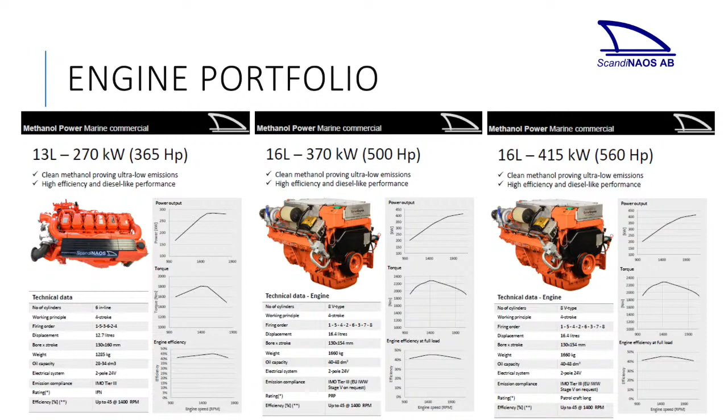ScandiNAOS has a broad engine program. We have developed this engine on board this ship, but we can also develop the smaller engines or the larger engines - the 13 liter and also the 16 liter - utilizing the same technology. We have examples of this both from land side as mobile power, and also from the marine side as generator sets, and as in this case, a propulsion engine. Here are some examples of data sheets.

Some conclusions on the ship conversion and the engine: the ship conversion is very simple. It's based on standard components, and this is actually technology, both for the ship and for the engine, that is available today. This is not rocket science, this is not future technology. We have shown in this project that we have the technology available today.

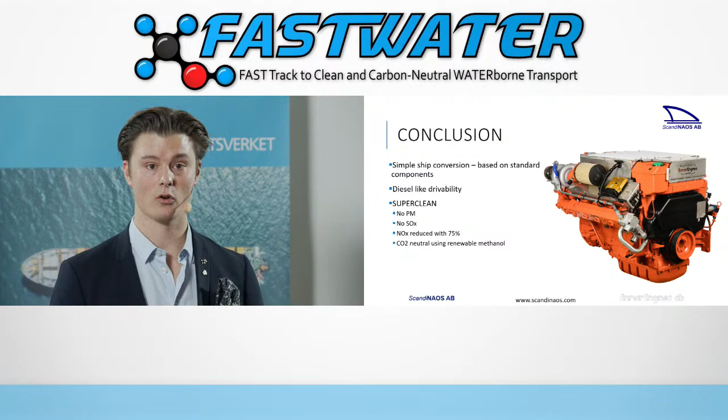The engine has diesel-like drivability, and it's super clean. We have no particulate matter, we have no SOx, NOx is reduced by 75%, and it's now CO2 neutral using renewable methanol, in this case from Södra.

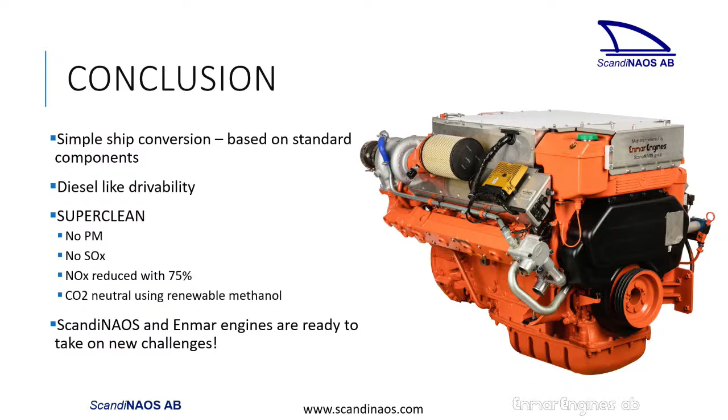ScandiNAOS and Enmar engines are ready to take on new challenges. So thanks from the ScandiNAOS team.